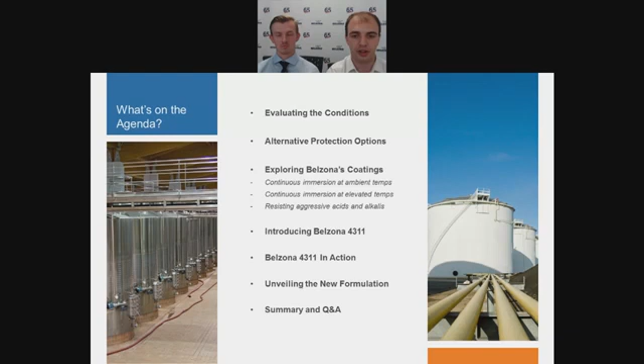Okay, so just to set the scene for the topic of chemical attack, on almost every industrial site we are likely to find some hazardous chemicals. In many cases these will also be corrosive. So without the proper mitigation of the effects of the chemically induced corrosion, assets such as pipelines, storage tanks and process vessels can degrade. This eventually could lead to leakage. This can introduce environmental issues and endanger personnel, so obviously it's something that we want to avoid.

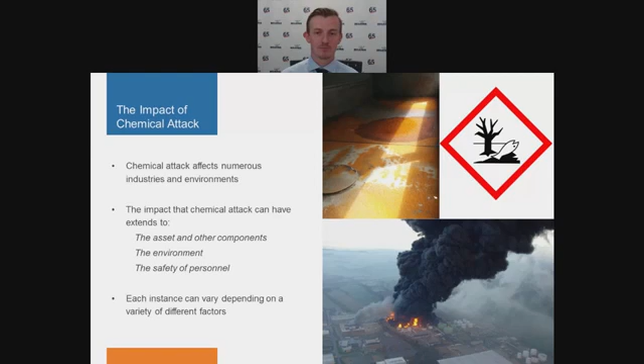It is therefore paramount that asset owners take preventative steps to reduce the chances of leaking and implement backup systems to contain any spillages that do happen. Okay, so before deciding on the best strategy to deal with this problem, it's important to understand the potential severity of the risk, i.e. how aggressive the chemical is.

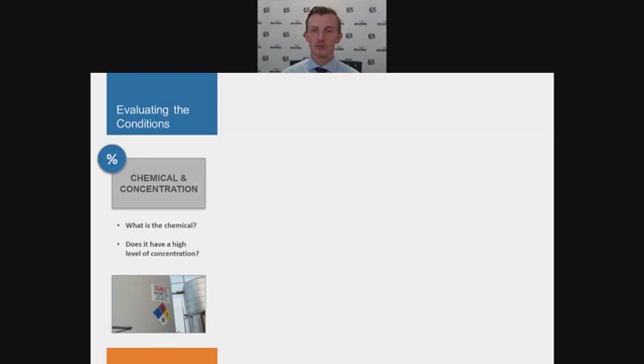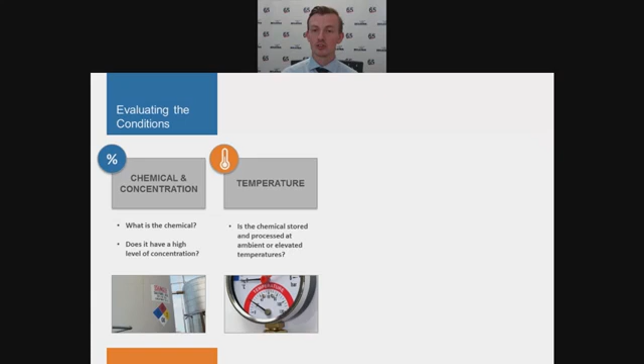So there's two factors that determine how aggressive any given chemical will be, and those are the concentration and the temperature. So the most aggressive scenarios will be where we have corrosive chemicals, highly concentrated, in constant contact with an asset. Okay, so that's the exposure time, and the type of contact with the substrate or the asset is also a critical part. So is it in constant immersion? Is it incidental contact from splashing or spillage, for example?

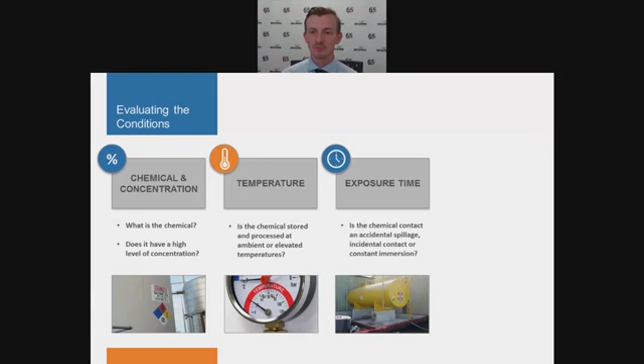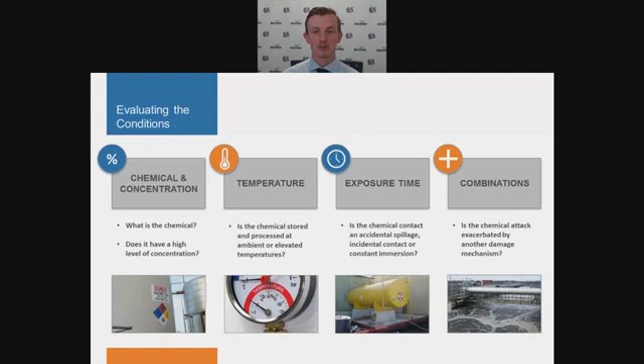Okay, and there are some external factors such as flowing fluids or abrasive particles that you might find in something like a pipeline system that can also introduce additional wear mechanisms. When combined with chemical attack, these additional wear mechanisms can significantly increase the potential for rapid failure.

There are many different options available on the market to protect from chemical attack, all with their own merits and potential drawbacks. Polymer coatings are a popular choice across industry due to the ease of application and maintenance, both at the new fabrication stage or in situ for existing equipment. There are a wide variety of coatings available on the market, which is good for asset owners as it allows them to select an option that is optimized for their specific requirements.

While it could be an advantage, the wide variety of coatings also introduces some danger, a little bit of a risk for asset owners due to the potential for improper product selection. So that's the challenge for Belzona as a coating manufacturer, is to ensure that asset owners receive technical support both during the material selection phase all the way to the installation and inspection. That way we can ensure that performance expectations will be met.

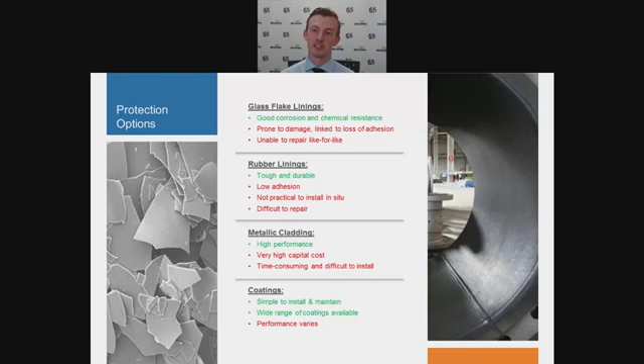So as you mentioned, the correct selection is hugely important when it comes to protective coatings, matching the solution to the unique conditions of each environment. Based on their capabilities, Belzona's chemical-resistant coatings can be separated into three categories. And first up, we have scenarios involving continuous immersion at ambient temperatures. This encompasses some of Belzona's 1300 and 5800 series.

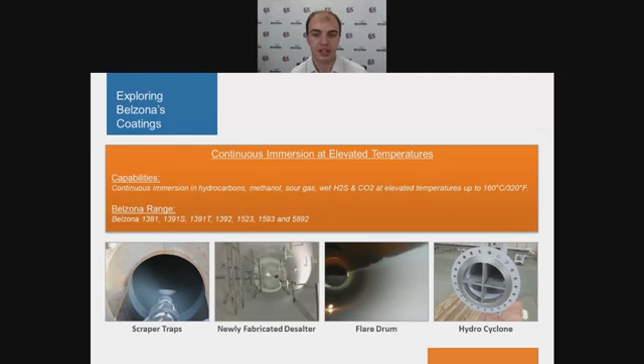These are ideally suited for processing environments. Conditions, for example, you would expect to see in flare drums or desalters within the oil and gas industry. As the pictures point out as well, these have been successfully used for this type of equipment for a number of years and have in fact been included in specifications for a number of major companies.

Now this moves us on to Belzona's dedicated range of chemical-resistant coatings, acting as barriers to aggressive acids and alkalis found throughout industries. The 4300 range can accommodate for highly concentrated solutions, including sulfuric acid, which is highlighted in the instances below for the bund and the offloading zone.

Now, I know that we've covered a number of products showcased in all three of these categories, and that can be a little bit overwhelming, especially because each of them have their own specific traits; it would take a long time to cover everything. So for the remainder of this presentation, we would like to focus on perhaps Belzona's most versatile chemical resistant coating, and that is Belzona 4311.

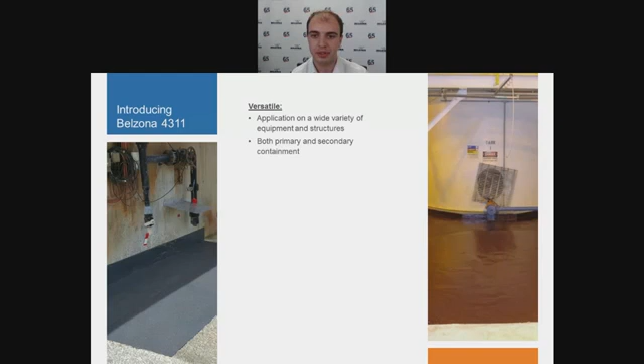Now, as I mentioned, this coating is extremely versatile and is suitable for application onto a wide variety of assets, including instances of both primary and secondary containment. This wouldn't be possible, of course, without its excellent chemical resistance. All of Belzona's materials undergo extensive testing, and Belzona 4311 is no different. In fact, prior to release, it is subject to 12 months of testing compliant with international standards. And on top of this, it's coupled with over 30 years of proven experience in the field in all manner of environments.

Ease of application is fundamental to any protective material, with Belzona 4311 benefiting from being cold curing without the need for any specialist equipment. In addition, it is solvent-free, and this aids the application in confined spaces, as well as ensuring there is no shrinkage or distortion due to evaporating solvents. And finally, and perhaps most importantly, it sticks. So whether it is a porous substrate like concrete or non-porous metalwork, it demonstrates excellent adhesion to a wide variety of substrates. So Tom's going to cover a few of these examples now and how they fared in service.

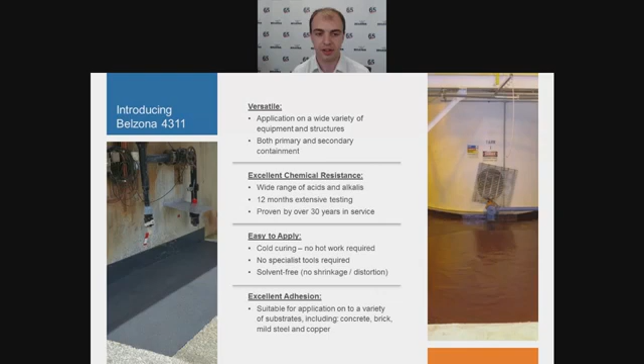Okay, so as Tom mentioned, the chemical resistant coating Belzona 4311 has been proven in service throughout many industries over 30 years. During that time, hundreds of applications have taken place, but we wanted to show you a snapshot of those from the most troublesome, difficult environments. So the first case is from this chemical plant, and it's a chemical channel, funnily enough. This was getting regular contact with 98% sulfuric acid, and it was eating away at the concrete.

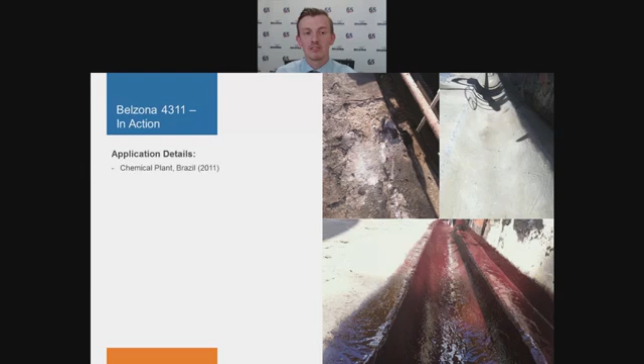Now, the asset owner had tried numerous different coatings prior to the Belzona coating, none of which were able to withstand the sulfuric acid for any prolonged period of time, and they were breaking down, and continually the concrete was becoming more and more deteriorated. So eventually the asset owner got in contact with Belzona, and we were able to clean the concrete, repair the concrete back to its original dimensions using our concrete repair materials, and then overcoat the concrete with the Belzona 4311 for further protection. This has now proven to be a much longer lasting solution than the previous solutions tried by the asset owner.

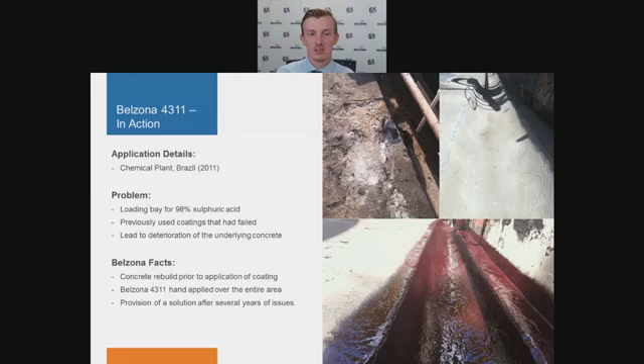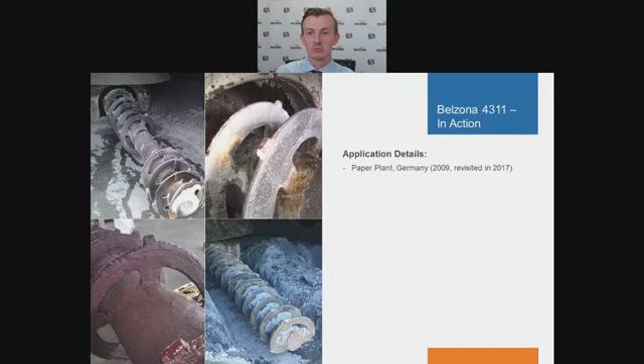Okay, so just to show the flexibility of the products in terms of the range of applications that it can be used for, we're going from a concrete application now to a metallic component. This screw auger at a pulp and paper plant was subject to not only heavy chemical attack, but also abrasion. The asset owner was replacing the equipment quite regularly, and this was quite a costly exercise, not just in terms of the capital cost of the equipment itself, but also the downtime and the maintenance required was unsuitable.

Okay, so what they did is they combined Belzona 4311 with another Belzona product called 1811, which is a highly abrasion resistant coating. They then put a top coat of 4311 to add the chemical resistance, and this application was still in service 8 years later. So it allowed the asset owner to get extended service life out of the screw, which reduced their maintenance requirements and saved them a lot of capital cost on replacing the equipment.

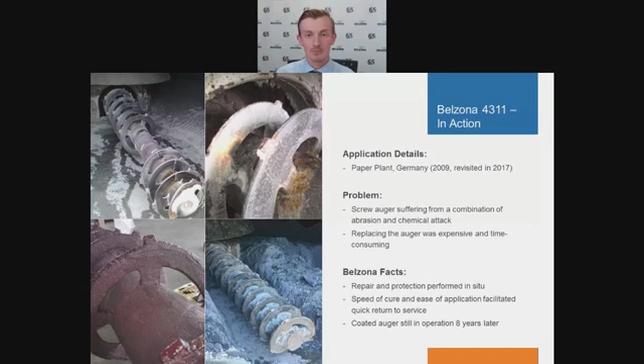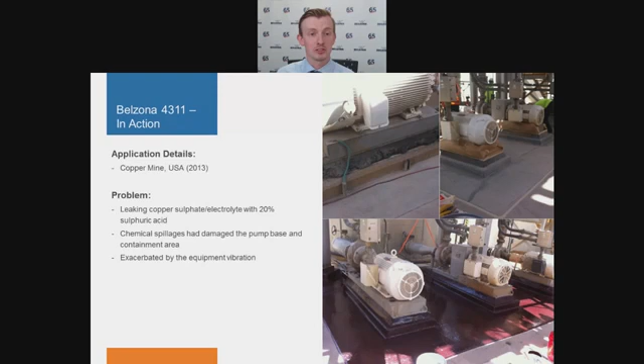Okay, so here's the third example. This one was a bund area for some pumps carrying sulfuric acid. The pumps had leaked and damaged some of the concrete on the plinth, the base supporting the pumps. Due to the vibrations of the pumps, the damage was actually propagating and becoming worse. So before it got to the stage where they needed to do some serious reparation that would require structurally repairing the concrete, they repaired it with the Belzona paste grades to reinforce the plinths, and then they applied the Belzona 4311 coating to give the chemical protection to prevent any further damage.

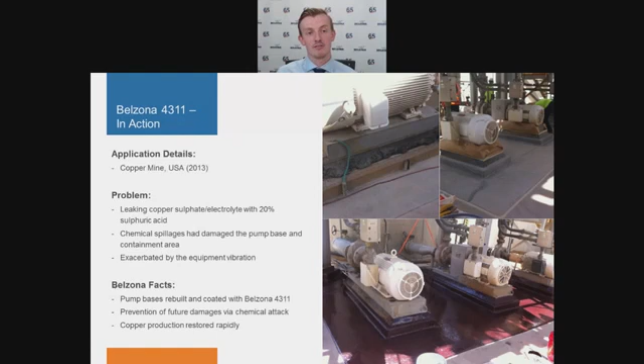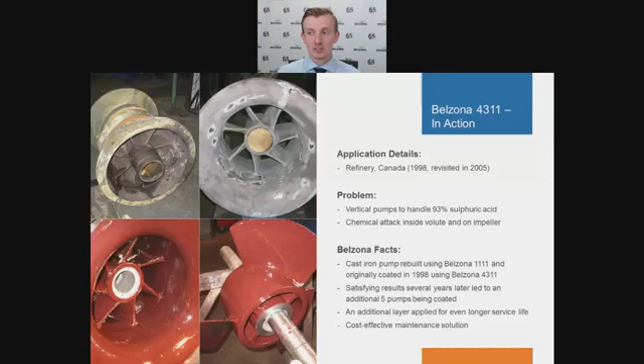After I think it was 3 or 4 years in service, it was revisited, and the coating was still in very good condition. So the asset owner was happy with that and decided to coat another 5 pumps. These were again revisited a number of years later and found to be still in very good condition. So now I'm just going to hand you back over to Tom, who's going to talk about the latest updates in the Belzona 4311 product.

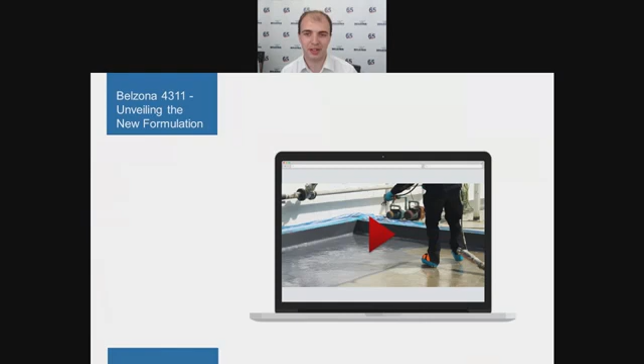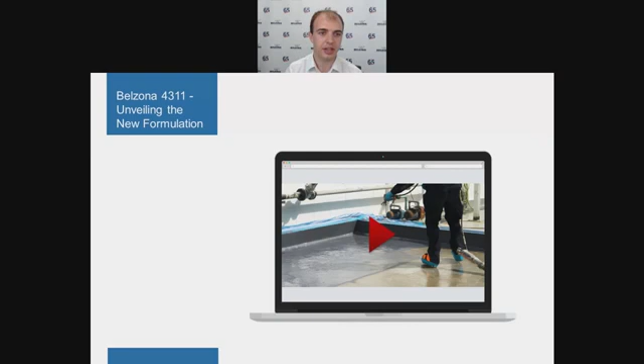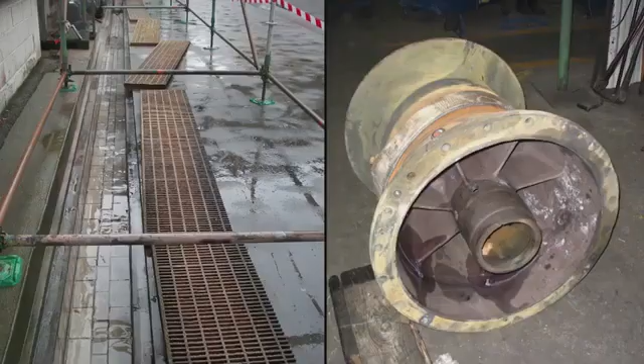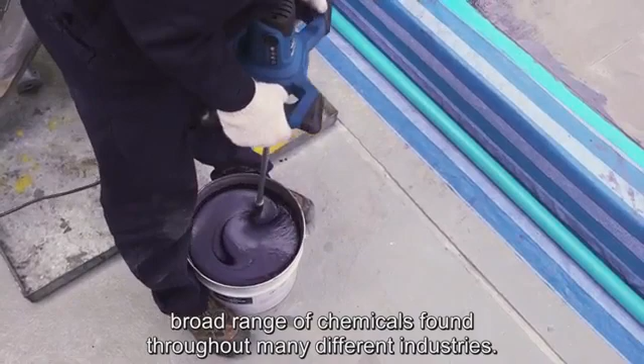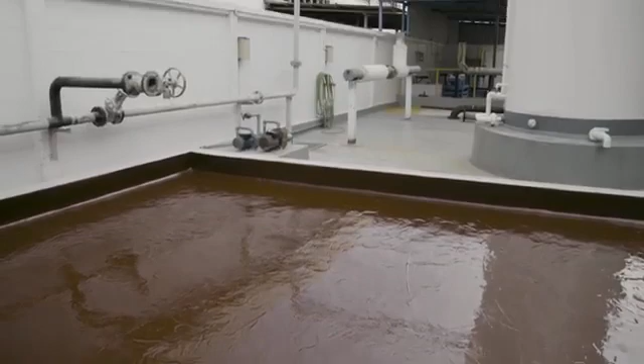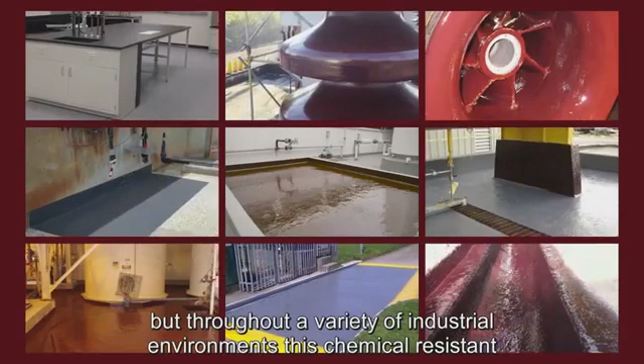Chemical attack affects numerous industries. Whether it's long-term exposure or just incidental contact, insufficient protection can have serious consequences, not only for the asset, but the environment too. Protective coatings serve to eliminate these hazards, and for over 30 years, Belzona 4311 has excelled as a versatile solution to combat chemical attack. As a final defense, secondary containment areas are prone to chemical contact and require outstanding protection. Belzona 4311 is ideally suited to these environments. Creating a resistant barrier, this coating withstands a broad range of chemicals found throughout many different industries. What's more, Belzona 4311 is easy to use. Its compatibility with spray equipment makes installation even quicker, especially over large areas. Whilst more detailed work can still benefit from the material being hand applied. An enhanced overcoat window also contributes to the ease of application. On closer inspection, Belzona's superior polymer matrix restricts the migration of amine molecules to the surface. Whilst amine bloom can narrow the overcoat window of other coatings, Belzona 4311 remains primed for up to 24 hours, aiding working flexibility and better planning. Lasting protection is essential for any chemical-resistant coating, yet exposure to UV can compromise performance over time. Other coatings can deteriorate substantially under these conditions, impacting their ability to repel chemical attack, whilst diminishing their coating thickness. However, heightened UV resistance ensures the retention of Belzona's protective properties for the long term. Together, these application and performance benefits make Belzona 4311 the complete solution. And not just for secondary containment areas, but throughout a variety of industrial environments. This chemical-resistant coating continues to provide exceptional long-term protection. Visit belzona.com for more information.

So, as the video alluded to, the addition of being sprayable is one of the application upgrades for this system. Formerly, it was just hand applied, but now it can be compatible with airless, single and plural spray equipment, which aids faster application, especially over large areas. Now, this goes hand in hand with the coating having an increased overcoat window. So it's been extended up to 24 hours and will not experience any of the negative effects associated with amine bloom, such as the loss of intercoat adhesion seen on standard epoxy coatings. And overall, this just aids a fast back to service time.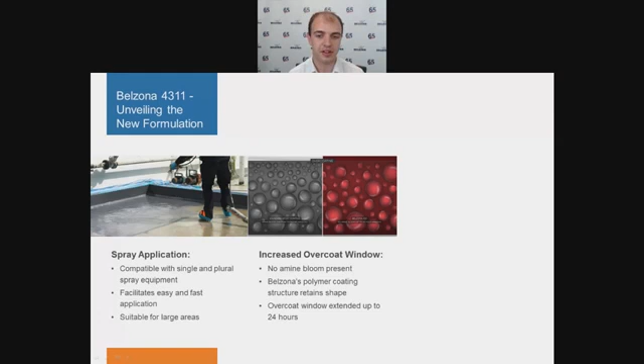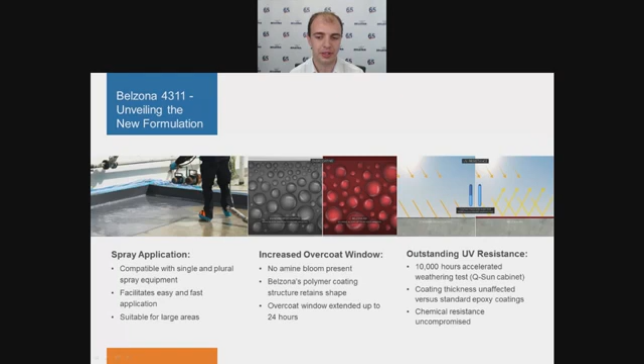Finally, we have the UV resistance of Belzona 4311, which has been enhanced even further. As we mentioned before, extensive testing is a priority for Belzona, and this coating was subjected to 10,000 hours in an accelerated weathering test, with the coating thickness barely affected. So in sunny climes where there are high levels of UV exposure, you can be assured that the chemical resistance of the coating will be uncompromised. Now I'm going to hand you back over to Tom just to give you a bit of a summary on the product benefits.

Okay, so as Tom mentioned, this is just a quick summary of some of the benefits of the Belzona materials. This applies to all of the coatings that you've seen featured in this webinar today, not just the 4311, but the other coatings that have been mentioned too. So firstly, the cold curing and solvent-free nature of the materials not only makes them safer to use, but also aids the application, as there's no shrinkage or distortion of the material during curing.

All of the coatings cure with a wide application window and no external heat is required. In terms of performance, all the materials we've shown today exhibit extremely high adhesion to various substrates, whether it's a metallic or a cementitious concrete type substrate.

And of course, there are way more products that we could go into detail about today. We don't have time to talk about everything, but as you may have seen, the Belzona products are suited to a wide variety of conditions. Overall, they give long-term performance, and this is backed up and proven with our case histories.

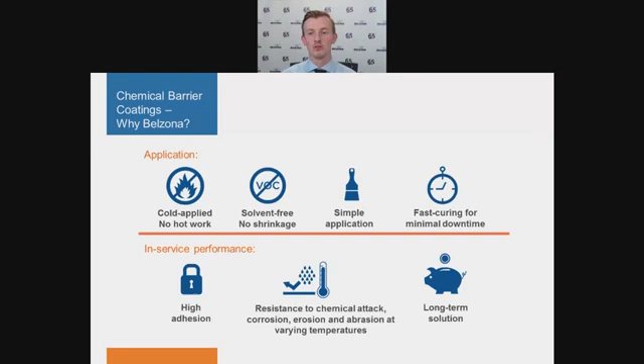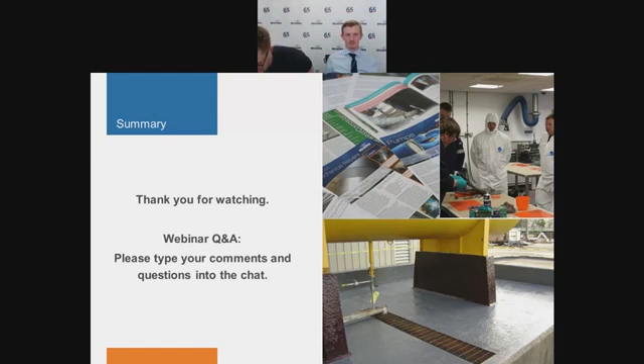We do have one that was asked. Does the new formulation have the same chemical resistance as the former version of Belzona 4311? So it's very, very similar in terms of chemical resistance to the previous formulation. In the majority of cases, it's either the same or improved chemical resistance. What we have added, and you can find this on the chemical resistance charts, which are accessible through our website, is that we've not only tested this version at 20 degrees, but also at 40 degrees C as well. So for hotter climates, it's possible to check that the product is suitable for those conditions as well as in cooler climates.

Okay, hopefully that helps answer your question. We also have another here. What would be your product line for immersion service tanks? Immersion in tanks? Yeah, it's quite general. Normally we need quite specific details, but you could use 4311, you could use 5811. There's the 1500 series for high temperatures, there's the 1300s for erosion. It depends entirely on the application you're looking at.